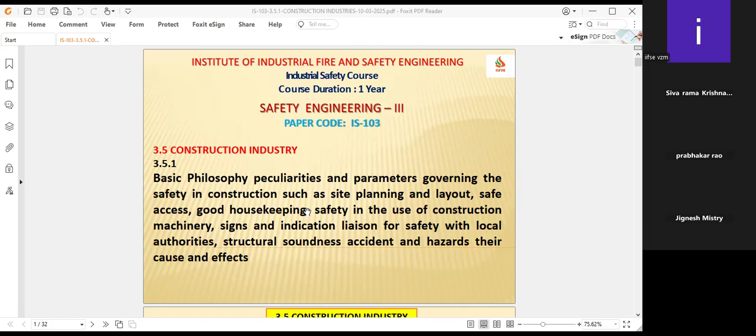These are some confusing words, so I separated them into parts so it will be covered systematically rather than vaguely. Part one is construction industry, covering basic philosophy, peculiarities and parameters governing safety in construction.

Next, site planning and layout. The construction industry in site planning and layout - what are the hazards? What are the possible hazards? What are the potential hazards? What are the safety measures that can be taken?

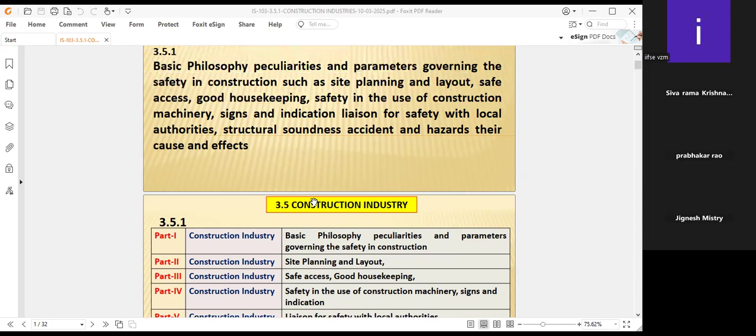Part three is safe access and good housekeeping. And part four, safety in the use of construction machinery and signs indication.

Part five, liaison for safety with local authorities. And accidents and hazards, their causes and effects, is the last part.

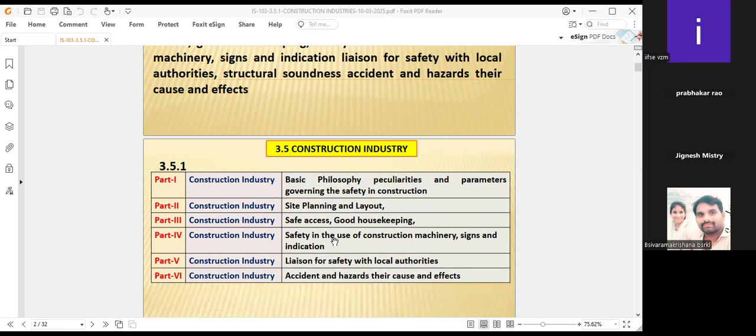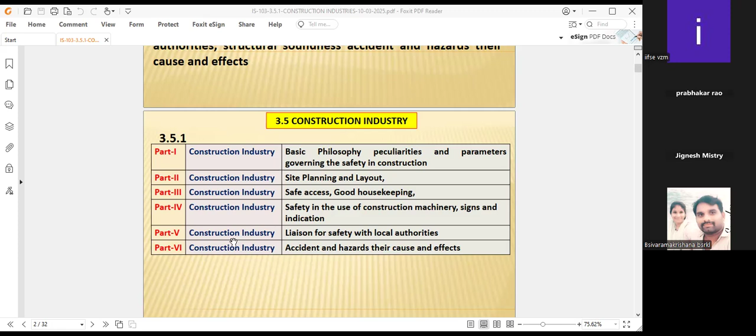This whole topic will be divided into these parts so it can be discussed in detail, helpful for examination purposes as well as for having a proper idea of construction industries. We are only covering construction industries, not real estate and so on.

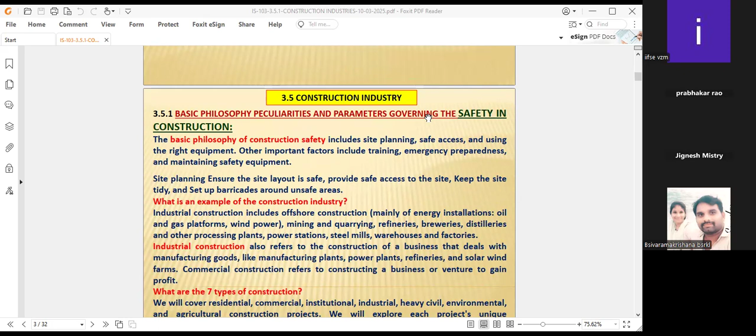Coming to the basic philosophy, peculiarities and parameters governing safety in construction - before going into detail, I will give some focus on construction safety also.

This basic philosophy of construction safety includes site planning, safe access, and using the right equipment. Other important factors include training, emergency preparedness, response procedures, and maintaining safety equipment with a proper schedule. This is a shortcut method covering construction safety.

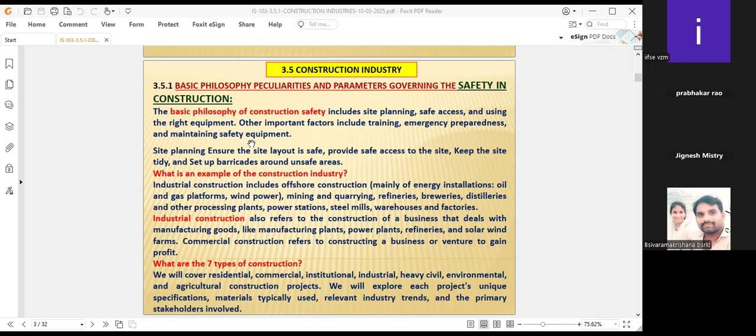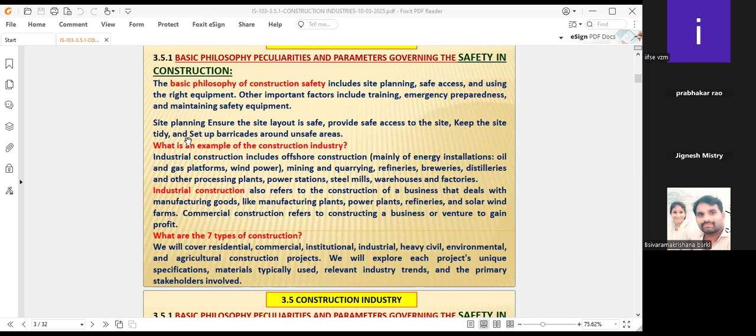Apart from this, site planning ensures that the site layout is safe, provides safe access to the site, keeps the site tidy, and sets up barricades around unsafe areas. That is the advantage of site layout.

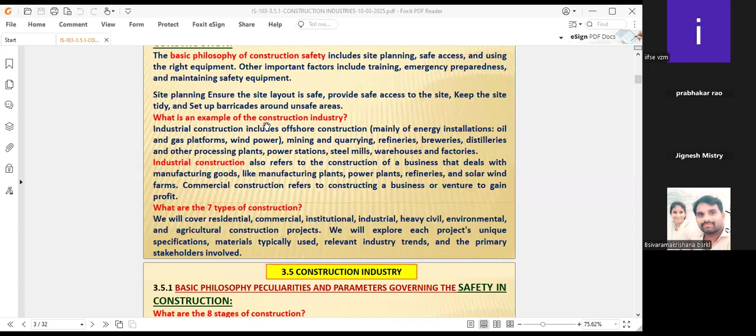What is an example of construction industry? Industrial construction includes offshore construction also - of course we are not covering this presently, but there is offshore construction mainly for energy installations, oil and gas platforms like ONGC, and wind power. Also mining, quarrying, refineries, breweries, distilleries, and other processing plants, power stations, steel mills, warehouses, and factories.

These are some examples that everyone is aware of, but this is the time to reveal our learning capabilities and knowledge. Industrial construction also refers to construction of a business that deals with manufacture of goods like manufacturing plants, power plants, refineries, and solar and wind farms.

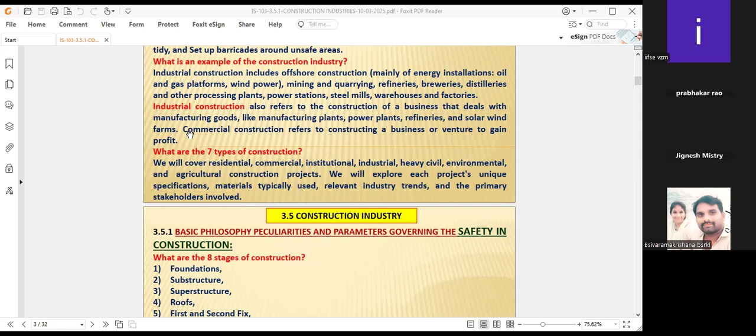Commercial construction refers to a construction business and venture - venture meaning real estate, to gain profit. So what are the 7 types of construction areas?

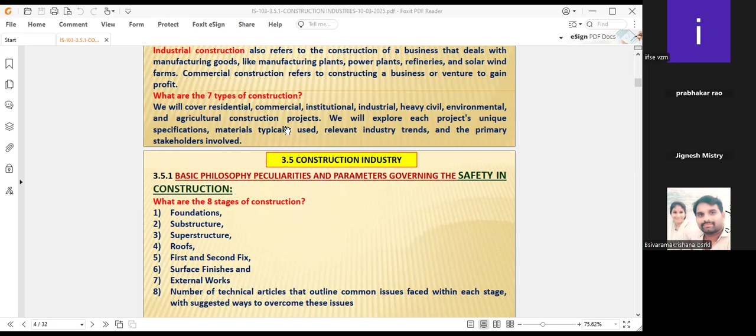We will cover residential, commercial, institutional, and industrial - only we are talking about industrial. Also heavy civil, environmental, and agriculture construction projects. These are some types of construction; we will discuss industrial construction only.

What are the 8 stages of construction? Foundation, substructures, superstructures, roofs, first and second fix - meaning floors, surface finishes, external works, and a number of technical articles that outline common issues faced at each stage: foundation stage, substructure stage, superstructure stage, and so on.

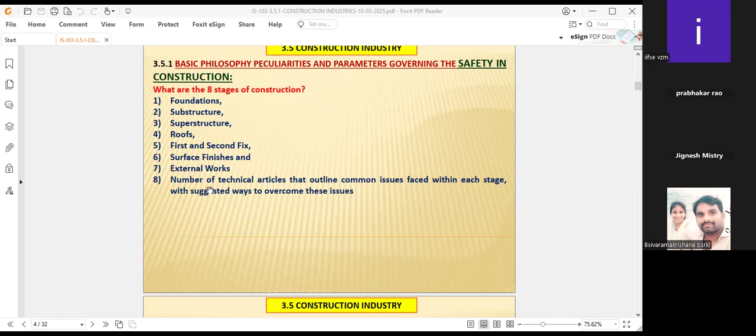Each stage has suggested ways to overcome these issues. What are the issues? At each stage, we have to ensure it is overcome in a safe manner. This is one of the basic philosophies.

In continuation with the principles of construction safety: personal protective equipment, fall protection including fall arresters, hazard communication, equipment safety, emergency preparedness, electrical safety, and housekeeping.

These are some principles we need to keep in mind always as prime factors of the construction industry with respect to safety.

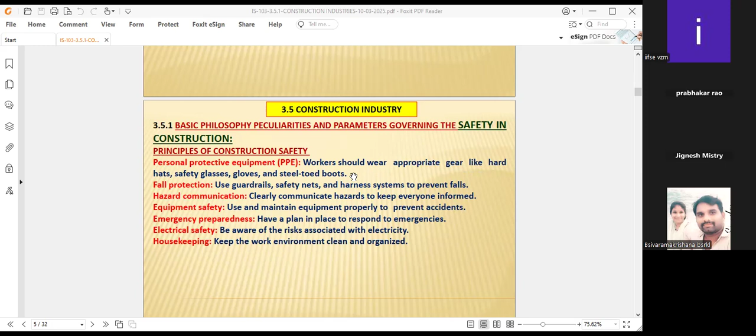Personal protective equipment: workers should wear appropriate gear like hard hats, safety glasses, gloves, and steel-toed boots, etc. Some other things also required for construction which I have not mentioned here, we need to wear. Fall protection systems should also be taken care of.

Use guardrails, safety nets, and harness systems to prevent falls. Fall arresters should also be taken care of, especially for work at heights as floors are constructed sequentially.

Hazard communication is also very important. There should be clear communication of hazards to keep everyone informed. We should not hide things among the workforce participating at the construction site. We have to clearly communicate what are the drawbacks for which an incident occurs.

Along with that, we have to clearly communicate the corrective actions to the people working at the construction worksite. Otherwise, there may be repetition of the same accident with the same nature or cause. That's why we are not supposed to hide anything from the workforce involved in construction. Hazard communication should be perfect.

Equipment safety is also very, very important - use and maintain equipment properly to prevent accidents. Here equipment means welding machines, tools and tackles, as well as

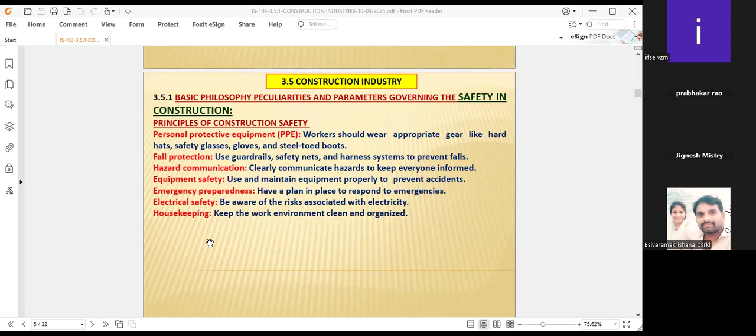Normally in construction, for safety's sake, they take only A and B shifts, but in some other constructions, night shifts are also taken, though heavy works will not be continued in the night shifts. Only small works can be carried out, depending upon the organization's interest.

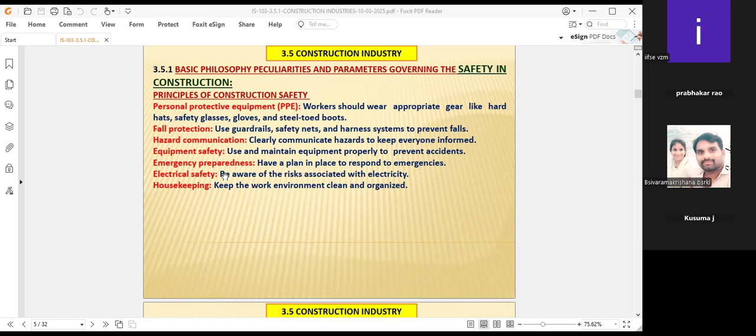That means housekeeping - these are very, very important factors, principles of construction safety. Keep this in mind. Of course, this is not limited to these principles. Other than these, with your experience, if you come across any other things, you may add to your experience and add your knowledge to this also. But these are not the limited principles for construction safety.

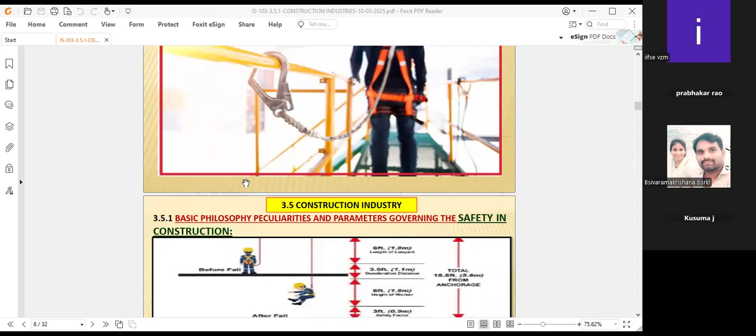Coming to fall protection, everybody knows that double step will be there. One is attaching, another is the things to be taken care of. This is the fall protection. The fall arrestor is also important. Nets will be prepared, and this fall arresting system, fall protection system, will be taken care of.

Very important - this slide is almost all 5.6 meters or 18.5 feet, divided into various factors like 6 feet length of lanyard, and 3.5 is the deceleration distance between before the fall and after. After the fall the person will be steady. Some calculation will be there with the 18.5 feet, or 5.6 meters, with respect to calculating the total fall distance.

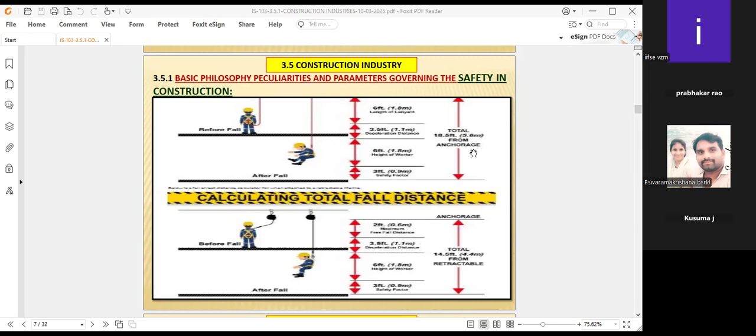Suppose if you see that this is 18.5, that is 5.6 meters otherwise. Or another way you can say, work at height means 2.5 meters and above only. Everybody has known this. But this is one of the calculation methods.

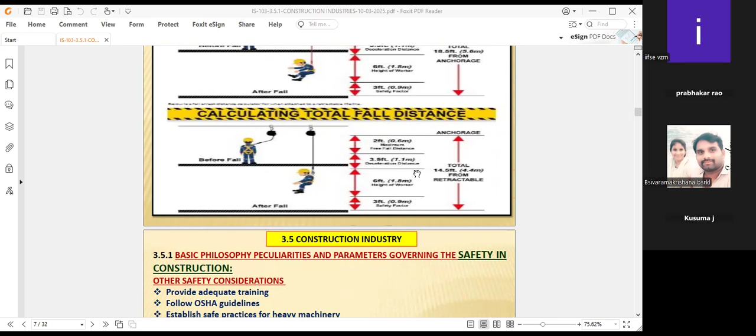In the 18.5 feet, 5.6 meters from the anchorage, divide into 3, 6, 9 plus 3.5, 12.5 plus 6, total 18.5 feet, also converted into 5.6 meters. If anchorage distance is 14.5 feet instead of 18.5, this is one of the calculations where we have to take care of 2 feet for the lanyard, 3.5. Here the 3.5 is similar, 6 feet is similar, and 3 feet. The only change is 2 feet and 6 feet, depending upon 18.5 and 14.5. This is the only difference we have to take care of. This is a very, very important calculation.

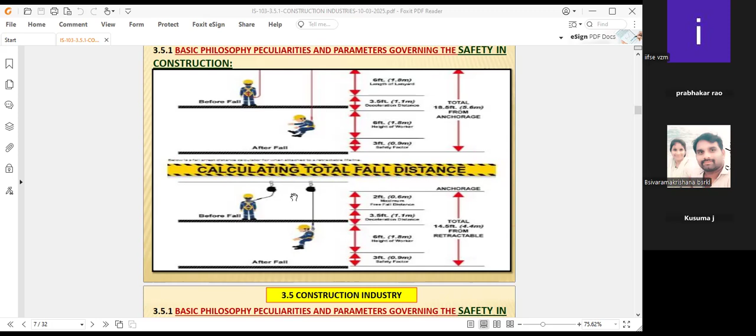This is available on Google for you. It is not a new thing for you people, because you have much more experience than me. But from an examination point of view, this is a well-known factor regarding the fall arrestor as well as fall protection with respect to safety in construction.

Other safety considerations here relate to safety in construction. Provide adequate training and follow OSHA (Occupational Safety Health Administration) guidelines. Establish safe practices for heavy machinery like trucks, forklifts, and heavy cranes. Safe practices mean following SOPs prepared by the manufacturer's manuals or by individual organizations, and these should be followed by the entire workforce using heavy machinery within the construction place.

Provide first aid as well, because once the emergency preparedness response procedure is prepared for the construction field, there's an emergency response organization chart. Apart from the organization chart, there's an emergency response team. We have to ensure qualified first aid providers and ERT (emergency response team) members are identified in the construction site, either by strips on the shoulders or identification on the helmets. This identification helps the workforce know this is the first aid person.

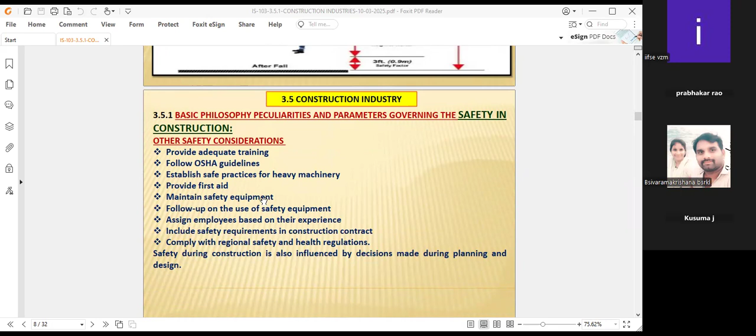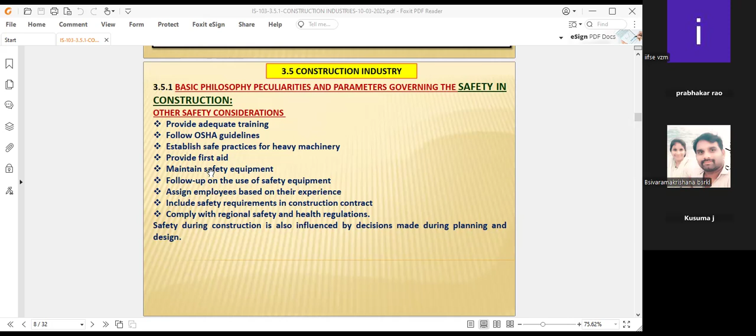Where equipment is worn out, it should be sent for disposal. Don't use defective or damaged equipment, and don't tamper with it. That means no shortcut methods for the purpose of the work, because some people use a chisel in place of a hammer or a hammer in place of a chisel. This tampering should not be allowed.

Follow up on the use of safety equipment is very important. This is different from maintaining safety equipment, because follow up on use means there should be no shortcut use of tools or shortcut methods for any equipment in the construction place. Maintaining means the equipment should be healthy and in good condition, with overall good workmanship for the safety equipment.

Assign employees based on their experience - a very important point. Those who have experience in excavation should be assigned to excavation work. For example, a maestri who has no experience in excavation procedures like foundation digging, digging for vessels and wells, should not be assigned there since he is not an experienced person for that. Employees should be assigned based on their experience.

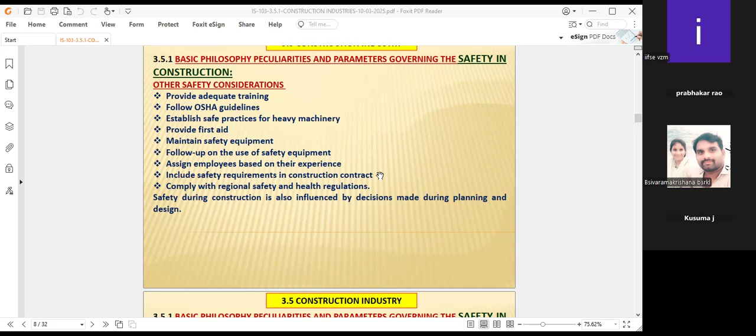Therefore, a driver should remain a driver, a conductor a conductor, a cleaner a cleaner. A cleaner should not be made a driver, and a driver should not be made a cleaner. Experienced persons should be assigned based on their work experience and workmanship.

Include safety requirements in the construction contract - very important in the contractor agreement. Some organizations give two types: one is a complete overall construction agreement given to the contractor, where no equipment, tools, or safety items are provided - everything, 100%, is in the scope of the contract. In that case, the organization must be very careful in preparing the work contract, since it must mention huge steps, because the industry itself won't take care of anything beyond the contract.

In this structure, the organization is more responsible for the contract and for what the contractor follows during the construction phase. Some organizations follow a 50-50 split, where equipment is supplied by the organization and manpower is supplied by the contractor. In that case too, management must take crucial steps in supplying equipment. Both the 100% contract model and the 50-50 model have very crucial stages, depending upon the contract terms and conditions.

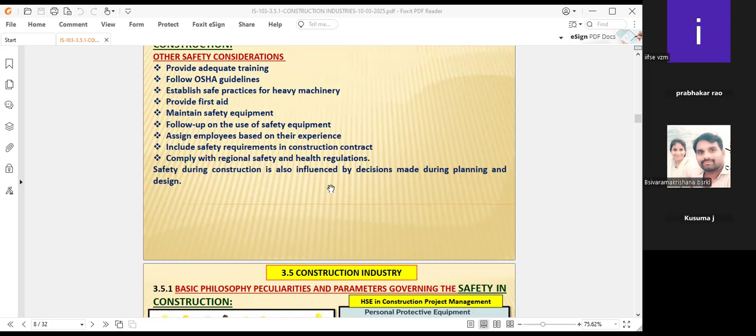Safety during construction is also influenced by decisions made during the planning and design stage, which we'll come across in the coming slides. Some decisions cannot be taken by floor members alone; top management has to step in to ensure decisions are not vague, but concrete decisions are taken during the planning and design stage.

For example, some safety construction posters I am giving for your awareness, though you are all aware of these things. Safety in the construction industry includes personal protective equipment like head protection, eye protection, and hand protection, chaps protection, meaning boiler suits.

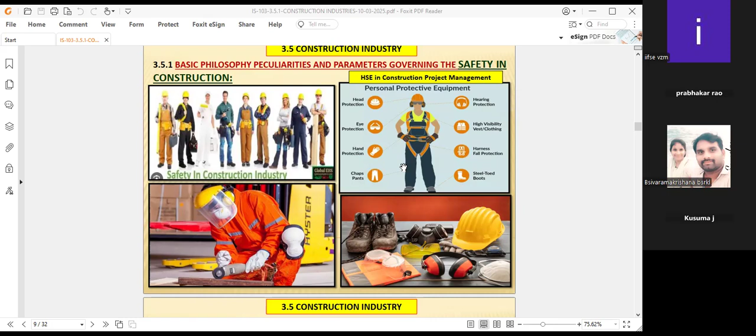As well as hearing protection, high visibility vest clothing, harness for fall protection, and steel toed boots. These are posters to be displayed at the construction site itself so people are aware of the consequences, hazards and risks. These are some of the safety appliances the workforce should use as per the nature of the work.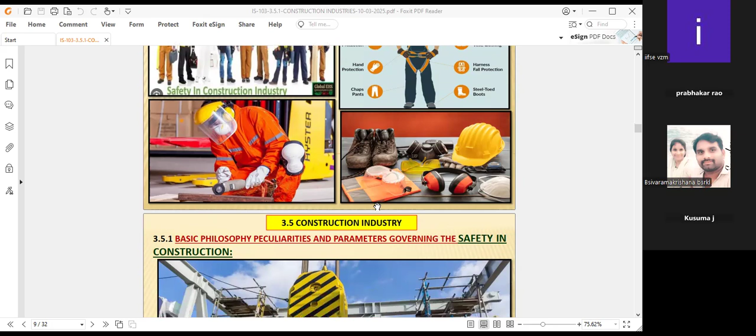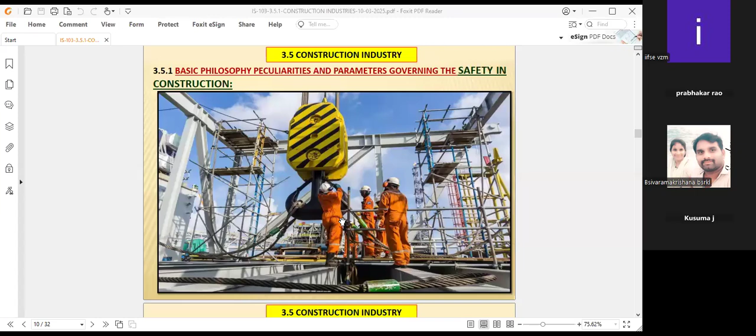This is one of the huge construction sites where assembling takes place. They have to see how they are working on the girders, channels and beams. We have to be very careful while working in the construction industry, and the full harness should be taken care of while climbing or working at heights. This is safety in construction.

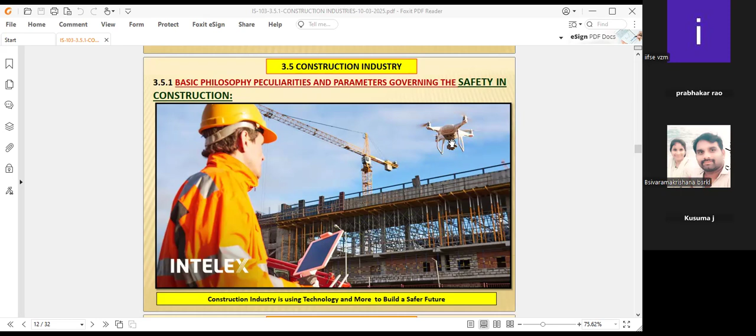Now another very important method: the construction industry is using technology more to build a safer future. They're using drones, because with the help of drones some industries immediately identify safety conditions, unsafe acts and unsafe conditions with immediate effect, without people needing to approach areas like crane safety zones. Drones are very helpful for this.

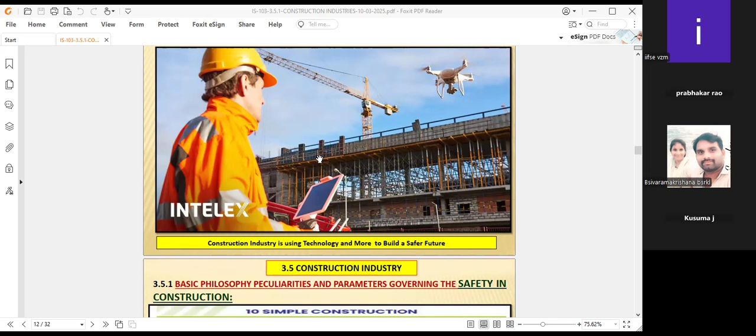This is a very important slide because drones are being used by some industries. Of course, industries have to develop further to use this technology.

These are the site safety rules which we have to display at the construction site, known by all the workforce, but awareness must be improved through education, training and counseling. Always wear PPE, be tidy, and follow signs, do not enter unauthorized areas where proper equipment must be used. If in doubt, ask. This is the symbol: get your induction.

Those having new employees, a new workforce, should have induction training done. Act safe and report if you're having any incidents, accidents, unsafe conditions, or unsafe acts. Immediately report to the next authority. Don't tamper, that means don't use shortcuts, and don't use unused or tampered equipment.

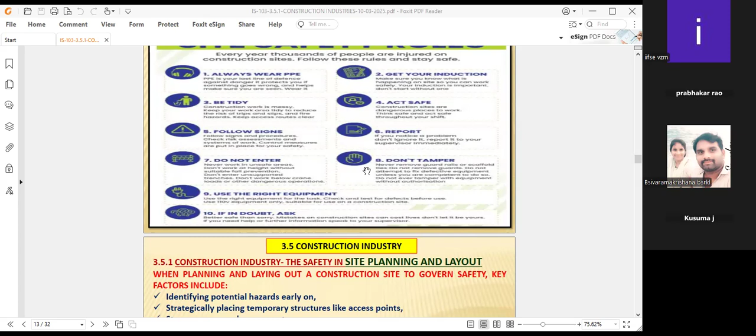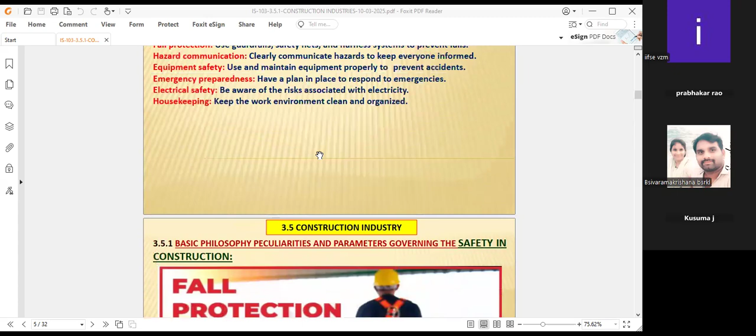You have to see these 10 minimum simple construction steps. Second one is the site planning and layout. When the construction first phase is over, where we already divided into 6 phases to understand better, this is over now. The site planning and layout is the second part.

We have to do site planning and layout also. During the site planning, layout decisions are to be taken, where at the time some decisions may not be taken, but in between also to be taken care of with respect to safety. That's why every site planning and layout should be very careful.

When planning and laying out a construction site to govern safety, key factors include identifying potential hazards early on, strategically placing temporary structures like access points, storage areas, and ingress routes, where very narrow or shortcut routes are there.

We have to mention the ingress routes with sign symbols and all, considering worker movement patterns while site planning and layout, implementing clear traffic flow management, ensuring compliance with relevant safety regulations and standards, all while prioritizing accessibility to emergency equipment and designated safe zones throughout the site layout.

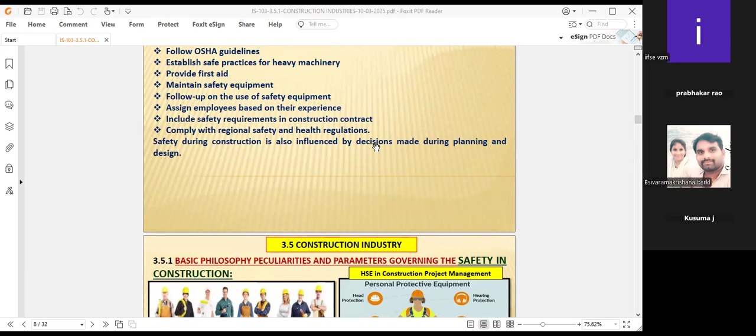Safety during construction is also influenced by decisions made during the planning and design. That is why we have to take care in the site planning and the plant layout also. The layout of the construction site should be planned to minimize hazards. This includes designated areas for different types of work, clear pathways for movement, and the separation of hazardous zones.

In the site layout, before approval, we have to see that a number of things are taken into consideration, and brainstorming is to be done. We have to do SWOT analysis also, strength, weakness, opportunities, and threat analysis to be done.

If there are any changes in the site planning layout, it should be done before approval itself. In that connection, the contractor is fixed at that time. The contractor crew or the contractor top management is also involved in the site planning and layout.

There should be no ambiguity or doubt. We have to ask them to follow and to participate in the site planning and layout designing, as well as before the approval of the top management or approval of the organization.

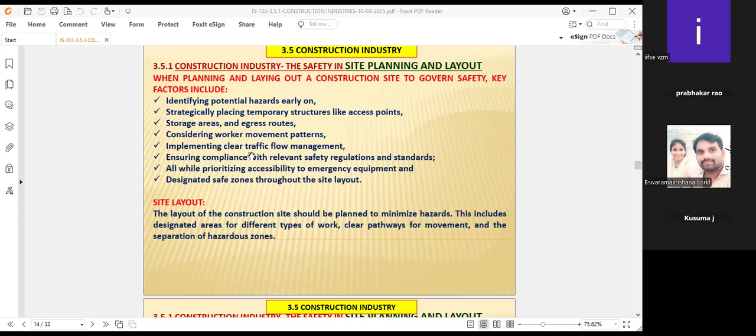All are involved, taking the signature of all the workforce, meaning top management as well as the contract top management who is awarded the contract. That should also be signed, and they have to issue the copy to be taken care of, giving some time to them to recommend any changes before the approval of the site planning and layout. We have to give time to the workforce as well as the contractor top management involved in the construction phase.

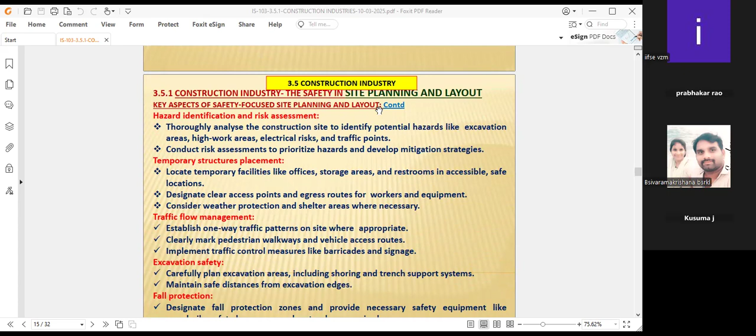Apart from this, there are key aspects of safety focused site planning and layout. During the site planning and layout procedure, what are the key aspects you have to see apart from these factors? Very key aspects are hazard identification and risk assessment to be done.